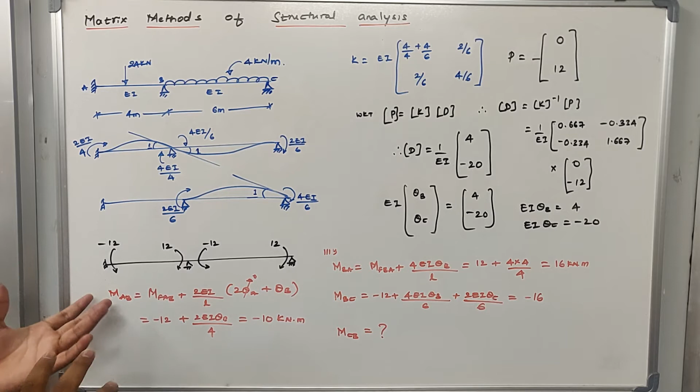Whenever I use the word force, it basically represents the moment or force. So if you want to create a rotation here, we need to apply a force. And how much force do I have to apply here? 4EI divided by 6. Because of application of 4EI by 6, the far end joint will be subjected to 2EI by 6. Now we have determined the moments created because of the unit rotation in member BC.

Similarly, if I am applying the unit rotation at this joint, member AB will also undergo the unit rotation. The forces created are 4EI by 4 at the near end, and at the far end we have 2EI by 4. This completes the forces created because of the unit rotation at coordinate 1. I had already explained this in the previous video also.

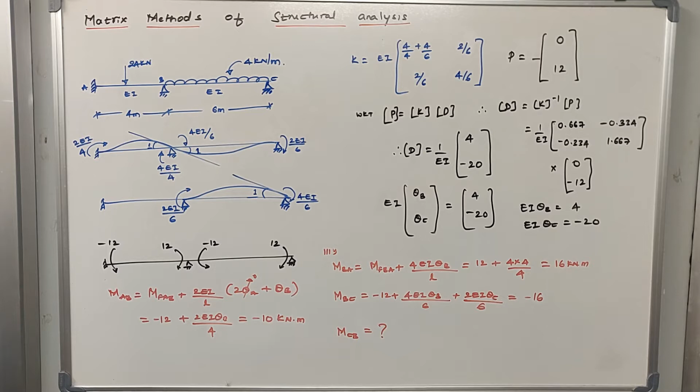Now let us go to the second coordinate. The second coordinate is joint C. At joint C, I am applying the unit rotation. The moment required to create this unit rotation is 4EI by 6 at the near end, and at the far end it will generate 2EI by 6, right? So these are the forces generated because of application of unit rotation at the first and second coordinates. Once this is completed, next we develop the stiffness matrix.

To develop the stiffness matrix, you need to determine all the forces exerted at the first coordinate because of application of unit rotation at the first coordinate.

Okay, so let us call this as K11, K12, K21 and K22. Let us first see what is K11. What is K11? K11, we have to go over here, right? So this is the force that is created because of application of unit rotation at this joint, at the first coordinate itself. So this is called K11.

Now we have two forces here, both are clockwise, both are positive, so add these two. So 4EI by 6 plus 4EI by 4. I have taken the EI common. So this is what is left over. 4 by 4 plus 4 by 6 will represent the K11.

Okay, now when K11 is sorted, let us write the K21. What is K21? K21 is the force that is created because of the unit rotation at the first coordinate. So this is your first coordinate. Because of application of unit rotation at the first coordinate, how much is the force that is created here? It is 2EI by 6. So 2EI by 6, EI as I have taken it as common.

Okay, now going to the next diagram. So now in this figure we are applying the unit rotation at the far end, at the second coordinate. If I am applying the unit rotation at the second coordinate, the force that is created is 4EI by 6. So this is your K22. We are determining the force at the second coordinate by applying the unit rotation at the second coordinate itself, which is 4EI by 6. So K22 is 4EI by 6.

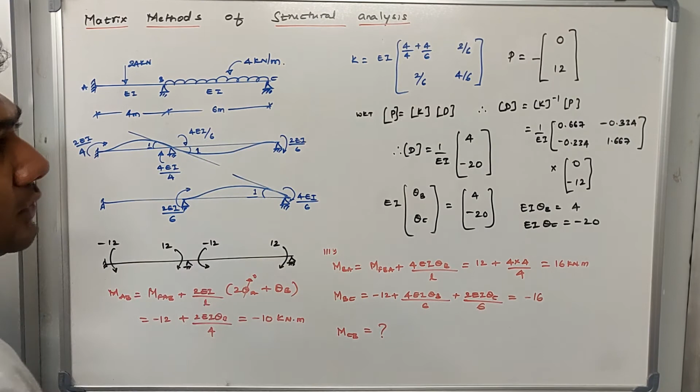Now let us go here. So what is K12? K12 is representing the force in the first coordinate. This is your first coordinate, right? The force in the first coordinate because of the unit rotation at the second coordinate is 2EI by 6. So I have already explained this in the previous video, but still I tried to explain it one more time.

Okay. So once you develop the stiffness matrix, next is to develop the force matrix. We know that we have these external loads, but we do not know exactly how much moment is created. So first we calculate the fixed end moments, which are arbitrary moments. 24 into 4 divided by 8 will give you the fixed end moment as the load is at center. So this will be WL by 8, WL by 8. Now this will be WL square by 12, WL square by 12.

Once you determine the fixed end moments, you have to go to the first and second coordinate. Joint B is my first coordinate, joint C is my second coordinate. There you have to take the sum of fixed end moments. At joint B, the sum is 12 minus 12, which is equal to 0. Similarly at joint C, the fixed end moment is 12. So at the first coordinate the sum of fixed end moments is 0, and at the second coordinate it is 12.

Now these are your fixed end moments, so I apply a negative sign to them. This force matrix should be applied with negative value. Now we know our equation, where force matrix is equal to K, the stiffness matrix, multiplied by the displacement matrix. Rewriting it, the displacement matrix will be equal to K inverse multiplied by the force matrix.

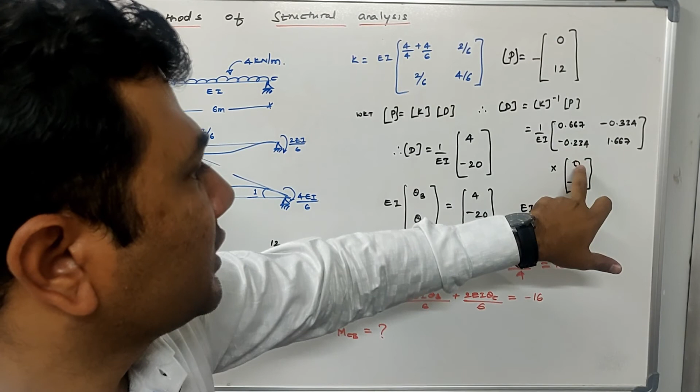Now this is your K matrix. I have taken the inverse of this K matrix and this is the matrix I get. Now I'll multiply it with the force matrix. This is my force matrix, 0 and minus 12, as you know. After multiplying these two matrices, I get the displacement.

Now what is the displacement matrix? There are two displacements taking place, theta B and theta C, so I have substituted them here. This was 1 by EI, so I sent it to this side; EI multiplied by theta B, theta C will be equal to this matrix. EI theta B is equal to 4, EI theta C is equal to minus 20. So I have calculated EI theta B and EI theta C.

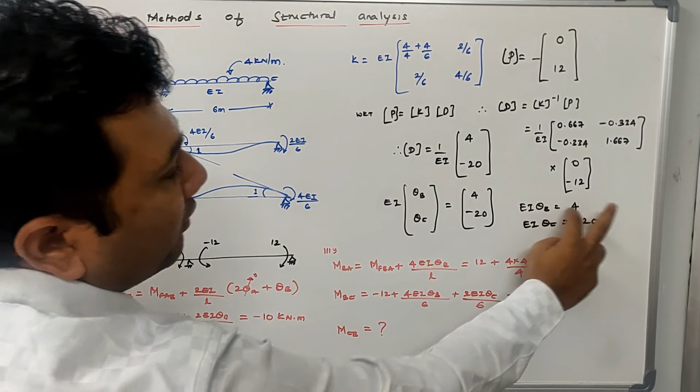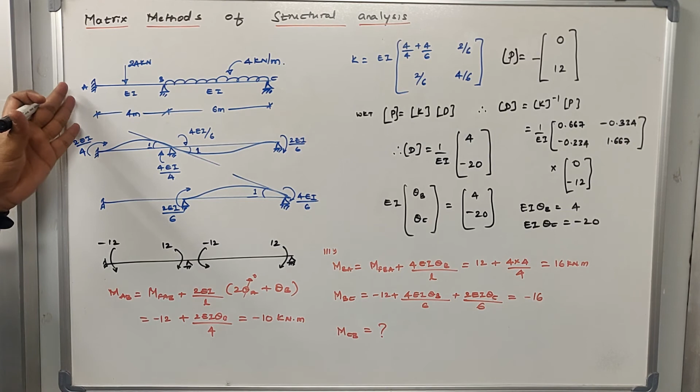Now let us take a quick recap of what we used to do in the slope deflection equation. We used to write a set of equations: MAB, MBA, MBC and so on. For this given problem we used to write 4 equations. And we developed 2 equilibrium equations: summation of moments at B equal to 0 and summation of moments at C equal to 0, that is MBA plus MBC equal to 0 and MCB equal to 0. 2 equations, 2 unknowns.

What were the 2 unknowns? EI theta B and EI theta C. The matrix method helps you solve the equations; the unknowns can be calculated from those equations. That is what we have done: we have calculated EI theta B and EI theta C. Once you solve these 2 values, the next thing is to apply these values in the slope deflection equation. All of you remember the slope deflection equation, right?

MAB is equal to MFAB plus 2EI by L into bracket 2 theta A plus theta B. As we do not have any translation, delta has been neglected. For this beam, theta A is equal to 0, so I have cancelled it out. What is left is MFAB plus 2EI theta B by 4, 4 being the length of member AB. Substitute the value of MFAB and solve: MAB is equal to minus 10 kilonewton meter.

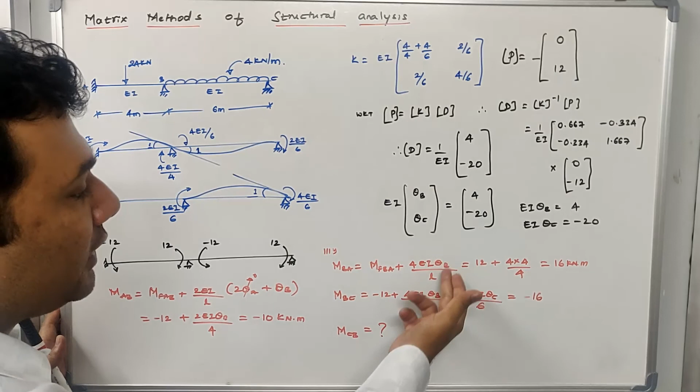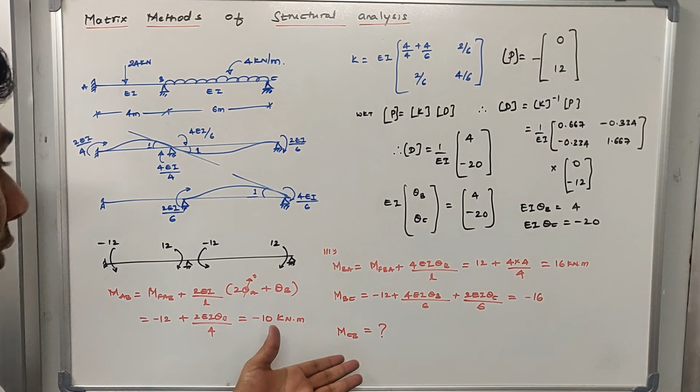Similarly you can solve for MBA: MFBA plus 4EI theta B divided by L, where L is 4 meter. Substitute all the values and determine MBA. MBC and MCB can also be calculated. But can you tell me the value of MCB without solving? It is very easy, because this is a pin joint. At the pin joint the moment will be 0, so MCB is equal to 0.

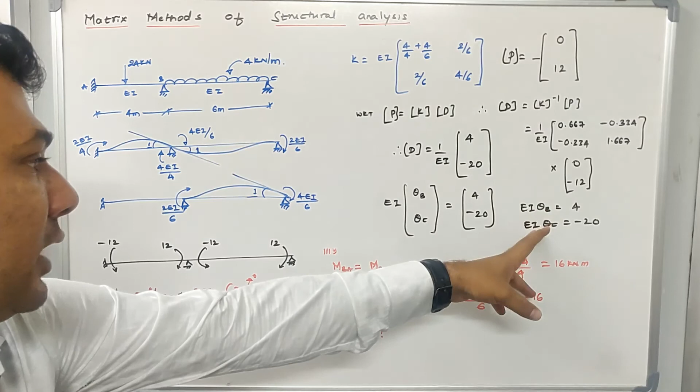But still, try to solve it by the equation also. Write the equation of MCB, substitute the unknown values EI theta B and EI theta C, and see how much moment you get at CB. So this is how we have solved this problem.